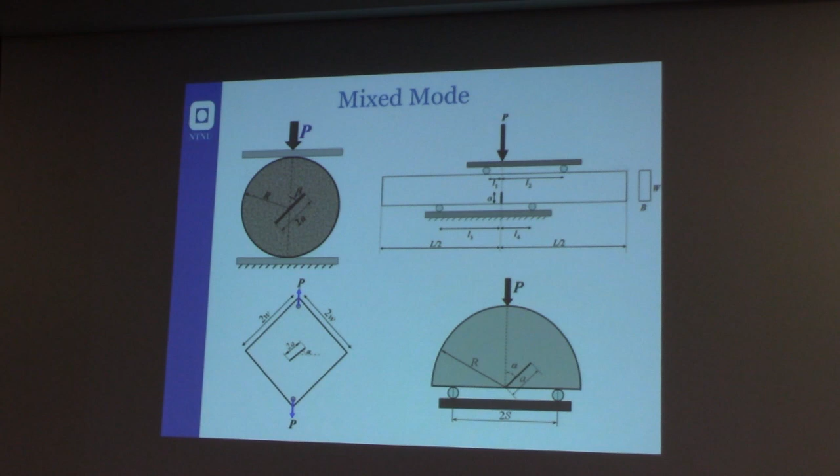So actually the problem of how to treat these modes in terms of final fracture prediction was studied many years ago. And the first two to study the work were George Sih and Fazil Erdogan in the group of Lehigh University that I have shown to you before. And they start to make some experimental tests with the inclined cracks to understand how they behave and how it is possible to predict the behavior of these cracks when they are failing.

Actually, the first paper that was produced from this study was dated 1963. It's a very famous paper that has nowadays more than 2,000 citations, and it's always referred as the most important contribution for mixed mode loading.

Actually, it was establishing a criterion that is called maximum tangential stress criterion. It is based on the idea that if you have a crack subject to mixed mode loading, the direction of the crack propagation is the direction where locally you have a mode 2 that is equal to 0. So locally the crack tends to propagate in the direction normal to the local stress field, so in a condition where you have a kind of equivalent mode 1 condition.

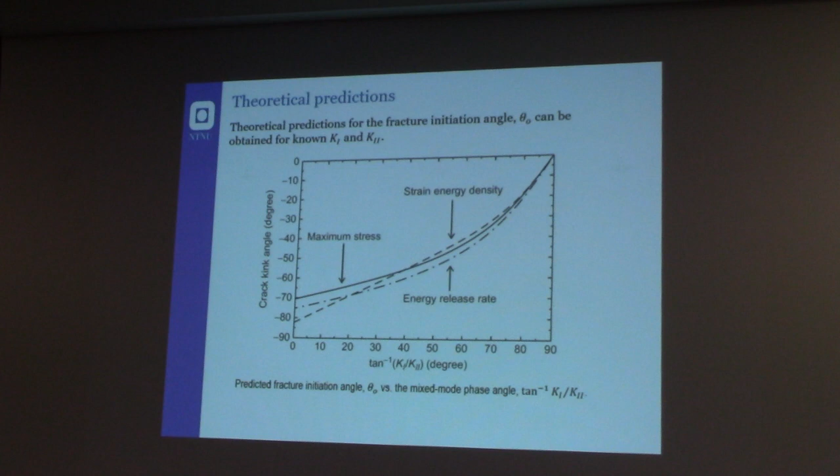After that, George Sih also improved the method, introducing a strain energy density approach that has two advantages. It's also sensitive to the Poisson's ratio variation, and is also insensitive to the mesh size. So this is a big advantage. But actually, in terms of angles of prediction of crack propagation, it is very similar to the maximum stress criterion. So there is not a big difference in terms of angle prediction with respect to the maximum stress criterion and the strain energy density criterion. Actually, they give almost the same value of angle in terms of crack propagation.

What it is very important when we deal with fracture mechanics is that we are assuming a linear elastic behavior for our material. So what it is very important is that we always can use a superposition principle for solving a complex problem. So this is very important.

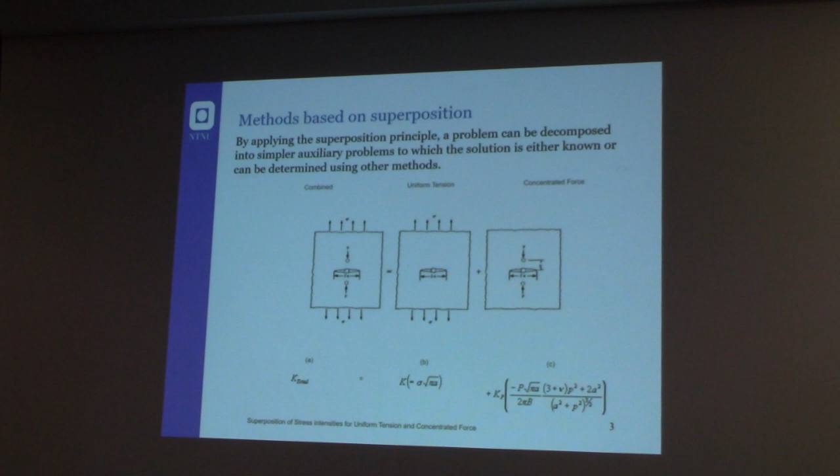Actually, locally, as I have shown before, plasticity occurs, and so sometimes the plastic field is not negligible and we need to take it into account. There are also elastic plastic fracture mechanics solutions. But of course, when you introduce plasticity, you lose the possibility of the superposition principle. So any time you apply a load to your component and obtain a solution, that solution is only valid for the applied load you have used in the elastic plastic solution.

Actually, the J integral is very flexible and can be applied also for elastic plastic solutions, and the stress field for a crack in elastic plastic condition is based on a J integral definition, mainly based on the work of John Hutchinson. As always happens in that period, there were different people working on the same topic. Rice and Rosengren obtained a solution, and Hutchinson obtained a solution in the same year, and after that they started to fight over who was the owner of the solution.

But what is very interesting is that you can express the stress field of the material in terms of the J integral, according to a kind of elastic plastic rule for your material that is no longer linear but follows a kind of power law rule, where n is the hardening exponent of the power law expression of your material.

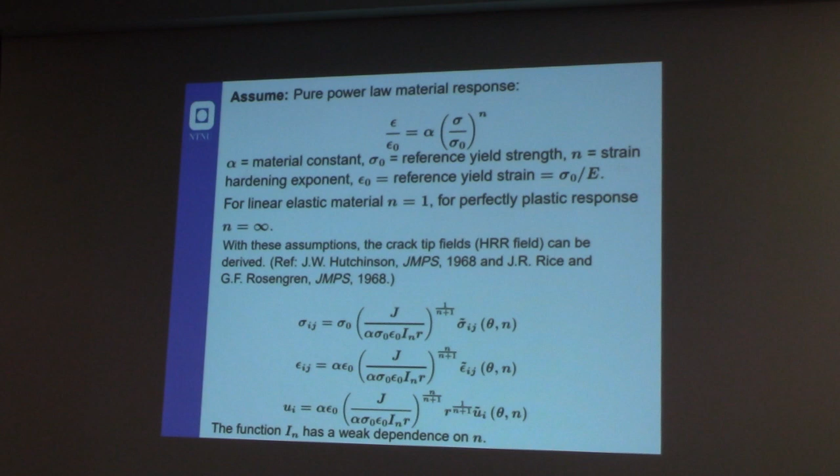And after that, you have this contribution in the exponent of n, which is a material property parameter.

So if you consider a kind of estimation of the plastic radius, it's always very convenient to be able to estimate in some way which is the plastic radius of your material. If you have a crack, you can always understand the size close to the crack where the material is over the yielding strength, and you can measure this radius and define it as the plastic radius of the material.

If the plastic radius is very small, you can apply without any problem linear elastic fracture mechanics. If the size increases, you probably need a more complex model considering an elastic plastic mechanics solution. Of course, the shape of the plastic zone depends on the mode you are applying.

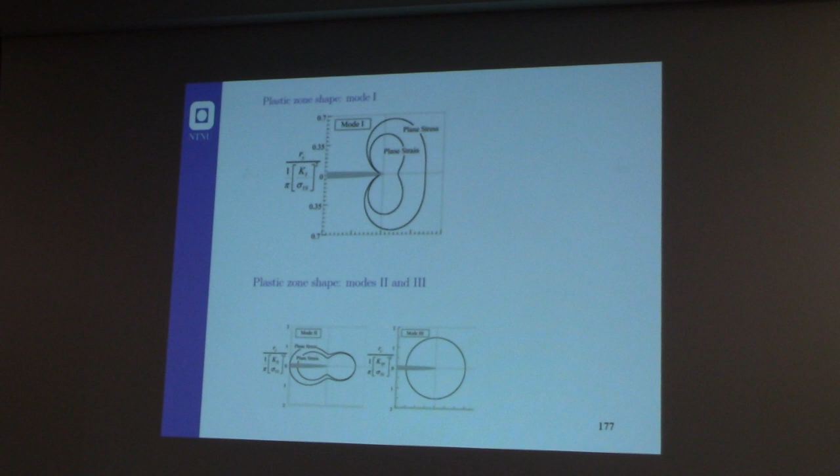If you look at the plastic zone shape for mode 1, you have a kind of butterfly shape, but for mode 2 you have a figure-8 shape, and for mode 3 it's perfectly circular.

But if you're in a condition with large plastic yielding, it means the plastic stress field is larger, and you actually have to design in this field. Linear elastic fracture mechanics only applies outside that region, which is not interesting for the design process.

If you consider this configuration, this is the stress field. n equal to 1 means a linear elastic trend of the material, and you have a slope that is 1 divided by 2 of the stress field. If you increase n, going to a hardening exponent equal to 3, the slope is decreasing. And if you consider an elastic-plastic material with fully plastic behavior, n is equal to infinite, and you don't have any stress singularity—the stress field is almost constant, so you are almost in the static case without any crack.

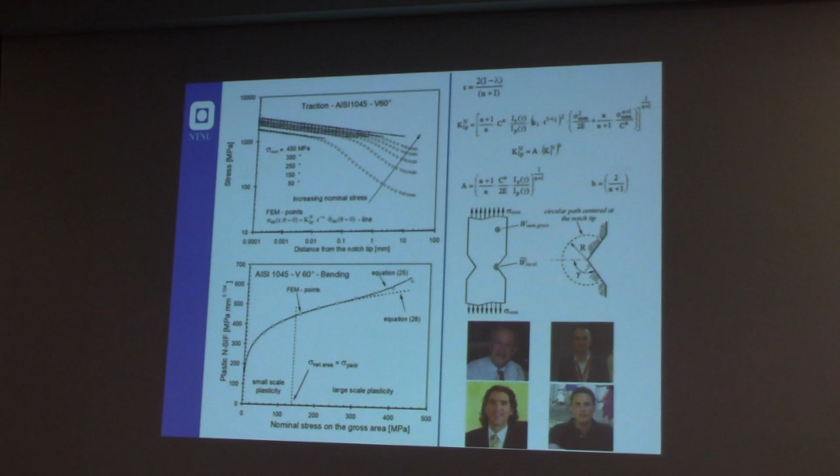And of course, the scale effect is also present for this kind of behavior. It's only the exponent of the stress field that is changing, so the scale effect is changing proportionally to the stress field slope.

I promised you before to arrive at least at the Williams asymptotic solution for linear elastic conditions, and now we are here. Considering the closed form solution, this is the most important contribution dealing with V-notches.

As I said before, if you consider a notch, it's like an extension of the crack case. The only difference is that you don't have parallel flanks of your defect, but you are opening the face of the geometrical discontinuity, maintaining the notch radius equal to 0. So the crack is a special case of this V-notch shape.

The first to solve the issue, as we mentioned, was a German 10 years before, but the most famous contribution is due to Williams, who published this work. Williams was mainly a mathematician, not interested in engineering problems at all, but he wanted to solve this issue and tried to understand which was the stress field close to the notch tip in the presence of a radius equal to 0.

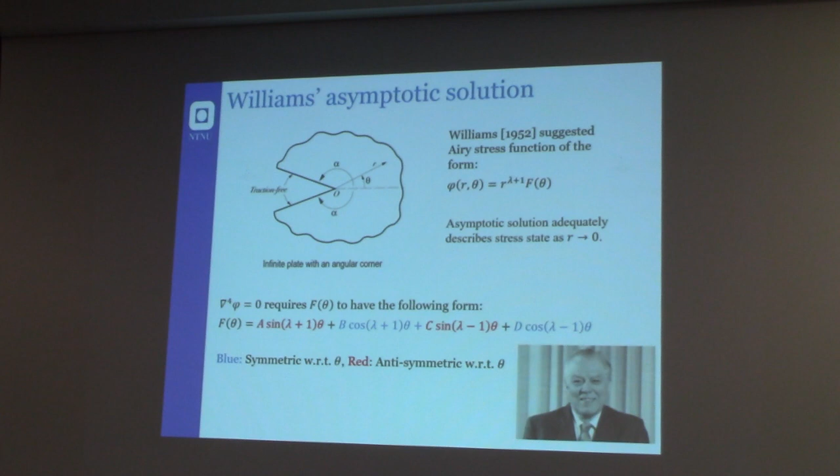What he did was apply the angular expression of the Airy stress function, and by imposing the boundary condition on the edge of the notch that have to be traction free—meaning the radial stress has to be 0, the tangential stress has to be 0, and the shear stress has to be 0 along the traction free edge of the notch—he imposed these 4 boundary conditions on both edges of the notch. So you have 4 conditions, and you are able to determine the 4 constants, and obtain the stress field close to the notch tip.

The Williams asymptotic solution considers that the strain energy is finite in a small disk of radius rho around the corner. It's important to understand that this consideration on energy is valid only if lambda is greater than 0, because if lambda is lower than 0, we have an infinite energy close to the notch tip, which is an impossible solution from a physical perspective.

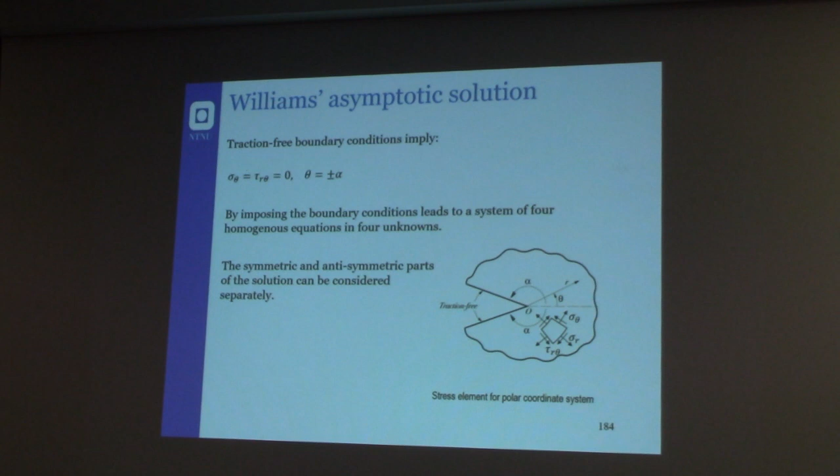What he did was impose that sigma theta and tau r-theta are equal to 0 along the flanks of the notch, and by imposing these boundary conditions, which are quite simple from a mathematical point of view, he was able to find these simple solutions. He showed that there are 2 equations: one for mode 1, the symmetric part of the solution, and one for mode 2, the antisymmetric part of the solution.

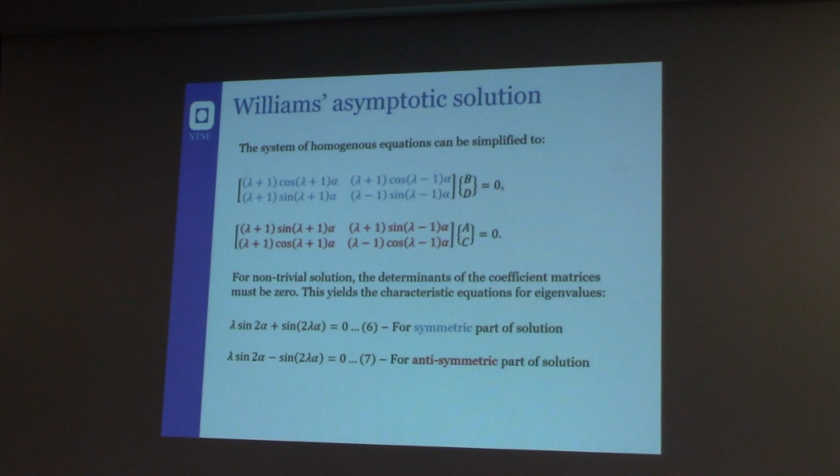Lambda, the unknown parameter in these equations, is called the eigenvalue of the solution, and is actually the degree of singularity of your stress field close to the crack tip. So if you consider lambda minus 1, and if you consider the crack tip, you have a slope that is minus 0.5.

As we did for the crack tip, it's possible to define the same stress intensity factor, which in this case as an extension is called the notch stress intensity factor. It is again a function of the stress field close to the notch tip, multiplied by the square root of 2 pi, multiplied by r with power 1 minus lambda 1 and 1 minus lambda 2 for mode 1 and mode 2. The slope of the stress field is given by 1 minus lambda 1.

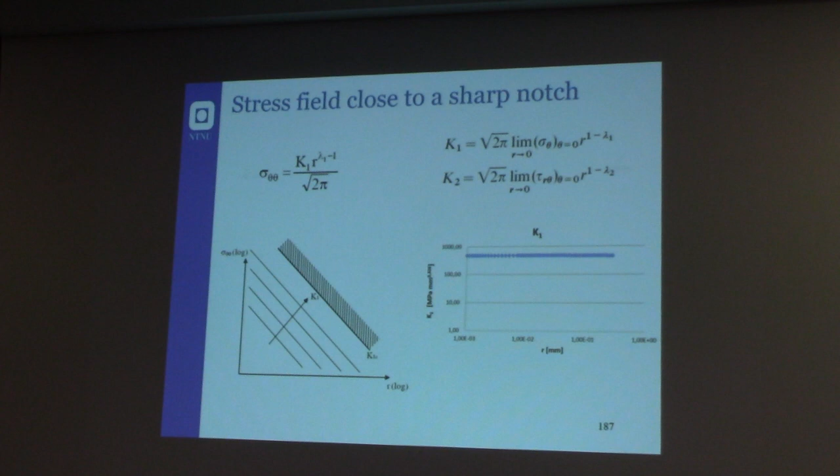This means that with a different notch opening angle, you cannot directly compare the value of K1 for, for example, a notch opening angle of 120 and one of 150, because the unit of measure is changing. This is also very important, and it's a limitation of the approach, because you have no direct comparison between different notch opening angles. This is a very strong limitation.

As I said before, the Irwin solution is a special case of the Williams solution. What's interesting to show, and was also discussed by Williams, and before that by Irwin, is that what we consider in linear fracture mechanics is usually the first term of a kind of series development.

When we consider the stress intensity factor, also in Irwin's equation, we are only considering part of the solution, not all of it, because the solution also has higher order terms that are more complex and change the exponent here.

The leading term is a function of the stress intensity factor, and for that term the slope of the stress field is minus 0.5 for the crack field. But if you want to consider higher order terms, which is sometimes important for thin specimens, you have to develop the series considering those higher order terms as well. It's important to remember this.

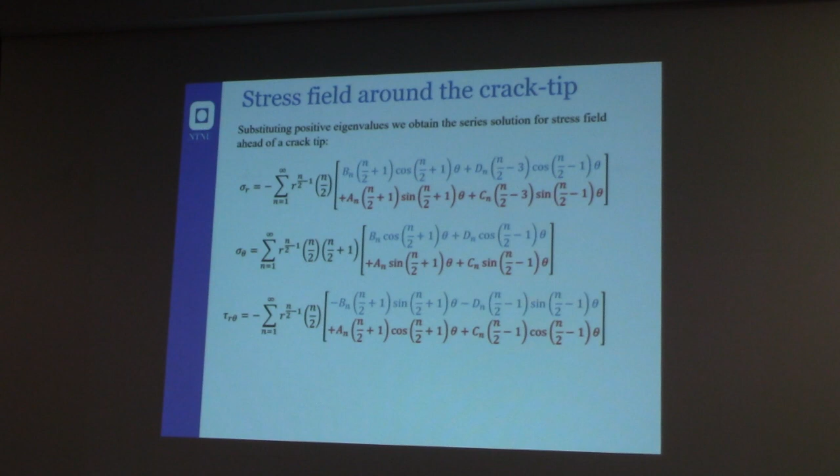95% of our applications are based on the main leading term, and we automatically neglect the higher order terms. But it's important to know that for thin components, sometimes the contribution of the higher order terms matters, and the first of these is the T-stress, which is sometimes very important and has to be taken into account.

After that, Lazzarin and Tovo in 1996, restarting from historical works by Creager and Paris and other works, were able to find a fantastic solution for generalized notches, considering not only a notch opening angle but also a notch tip radius different from zero. They extended the Williams solution to a notch with an opening angle of 2 times alpha and a notch radius different from zero, giving a very interesting solution.

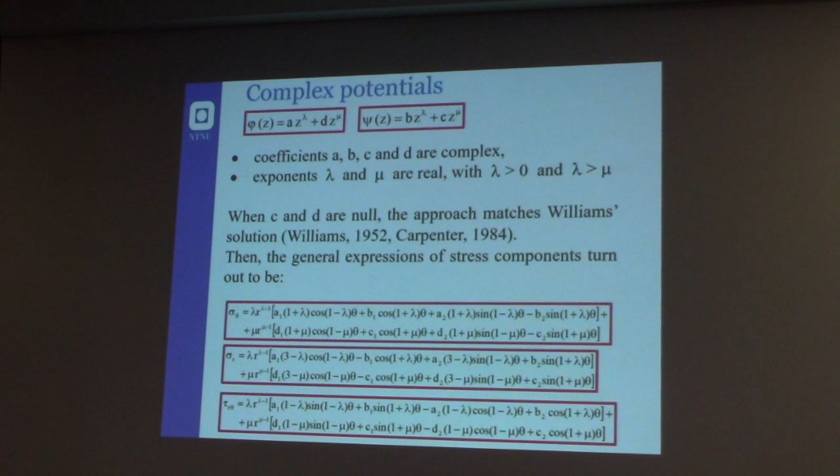They used the complex potential method, applying Muskhelishvili-Kolosov, which we didn't have time to see today but is not so far from the Airy stress function method. What they did was put in the notch radius, which created more complexity in the solution, so they got more constants to find with respect to Williams, but taking into account also the notch radius.

But they were able to impose very smart boundary conditions in the PhD thesis of Roberto Tovo, and they found this final solution that has two parts. The first part is actually the Williams solution, and the second part takes into account the notch radius contribution. So this is very useful because with this solution you can treat in a generalized way not only the Williams solution and the crack solution, but any kind of notch with any shape and any notch radius.

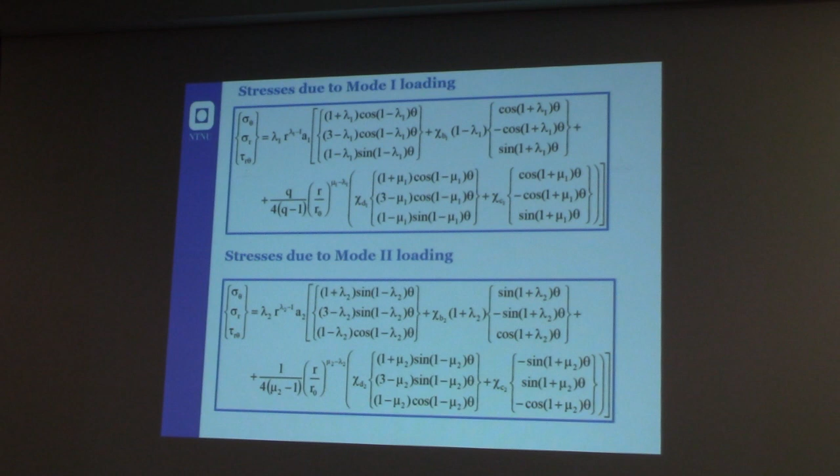So, as a special case of this solution, you can see that we have the Williams solution. But Lazzarin and Tovo were also able to give, as a function of the notch opening angles, all the parameters necessary to apply the equation very easily in a closed form.

So actually, even for a non-expert person in fracture mechanics or notch mechanics, the applications are very easy to use and implement because there are tables reporting the coefficients as a function of the notch opening angles, which make the use very, very convenient. And of course, they define the stress intensity factor in the case of a sharp notch.

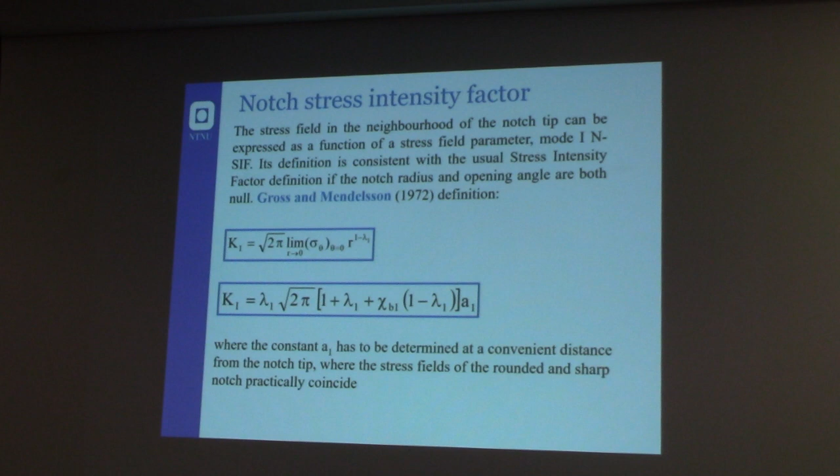They were also able to extend this definition to a kind of generalized notch stress intensity factor that is not only taking into account the sharp case, but also considering a round notch. So they define this kind of stress intensity factor also in the presence of a notch radius different from zero, extending the Gross and Mendelsson definition of 1972.

One of the most interesting applications of these results is the study of welded joints. Because welded joints usually fail from the weld toe or the weld root in the case of lack of penetration. So usually the two critical points for a welded joint are the weld toe and the lack of penetration, which can be considered like a crack.

So what Lazzarin and Tovo did was to apply their analytical framework to this case and express the stress field for mode 1 and mode 2 as a function of the stress intensity factor. Of course, this equation, if rho is equal to 0, is also a kind of Williams equation in this case.

And they verified the validity of the equation considering finite elements and different kinds of notch radius, notch depth, and notch opening angle, and the solutions are very accurate for different kinds of configurations and notch opening angles.

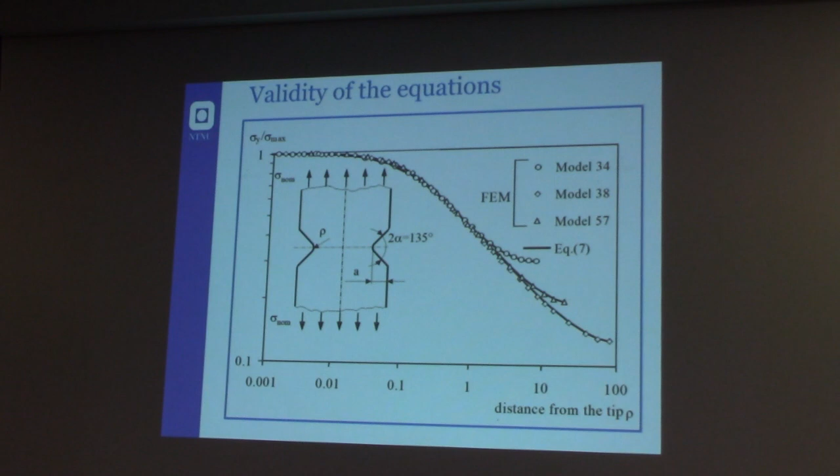I will go back later to the design of welded joints. The problem of the notch stress intensity factor approach when designing a welded joint is that if you have a weld toe and a weld root, here you have a crack and here you have a notch which can be considered with an opening angle of 135 degrees. But as we discussed before, the notch opening angle of 135 degrees has a different stress intensity factor or notch stress intensity factor, which has a unit of measure that is different from the unit of measure of the crack tip.

And so if you don't know where the failure happens, here or here, you cannot directly compare the stress intensity factors because they have different units of measure. So this is the limitation of a stress intensity factor approach for welded joints. Usually, if the weldment is well designed, the failure always happens at the weld toe.

You can neglect the contribution of the weld root, and in that case the notch stress intensity factor is a very powerful parameter. But it still has the limitation linked to stress field distribution, so it is mesh sensitive. You need a very accurate mesh close to the notch tip to evaluate the stress field accurately, and this makes the computational application very complex if you have a complex geometry.

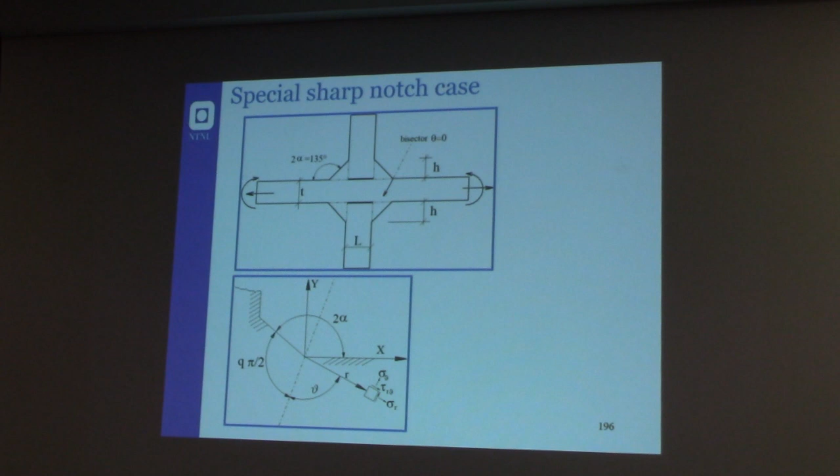The first to try to solve the problem of a notch using a kind of very old approach based on an Airy stress function was Neuber, in his book of 1937, when he was only 32 years old. He wrote this book at that age, and tried with this complex Airy stress function equation.

He was able to find the stress field exponent as a function of Q. After that, because it was very complex, he was able to express only the sigma theta along the notch bisector line, using the definition in Cartesian coordinates of the Airy stress function. He found this solution. This value is not so different from the value of lambda present in the Williams solution, so it is not so far from Williams' solution in terms of eigenvalue.

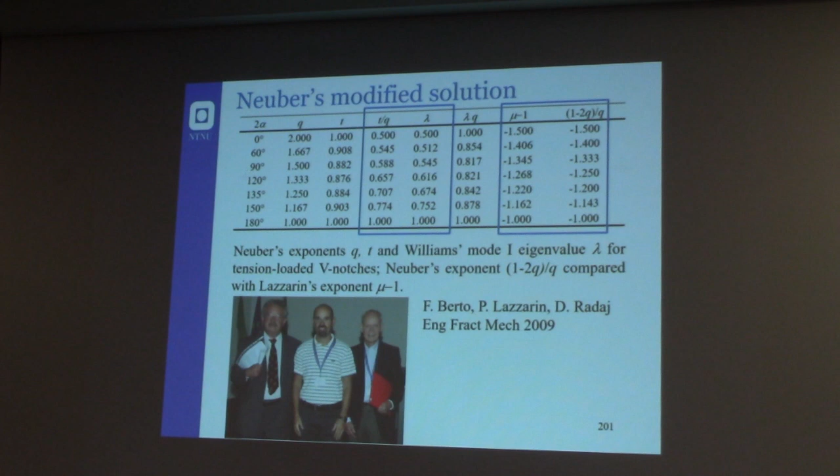What we did later, in 2009, was to modify Neuber's solution, improving it. We were able to obtain a very accurate exponent for the stress field, and also a stress field that could predict the stress field at a far distance from the notch tip, and under complex mode loading conditions.

Comparing finite element analysis with the Neuber solution, you see that the Neuber solution deviates from the finite elements. What we did in 2009, with myself and Radaj, was to improve the solution, making it almost perfect, changing as a function of, for example, the notch radius, while still maintaining a very accurate solution. It seems a small difference here, but it can be 30-40%, which can be very important for the final design of a component. It's not so small.

We exchanged a lot of faxes because Radaj was an old professor, so all communication was by fax. I want to remind a funny episode: he had a very old Mercedes with a fax machine inside the car, connected to the battery. We started fighting over a coefficient during a trip he made, and I completely destroyed his car battery. He was upset with me because I sent many pages of analytical discussion and points, and he wasn't able to reach the hotel during the trip. It was quite fun, but we fought a lot over this paper, because of course he's very German.

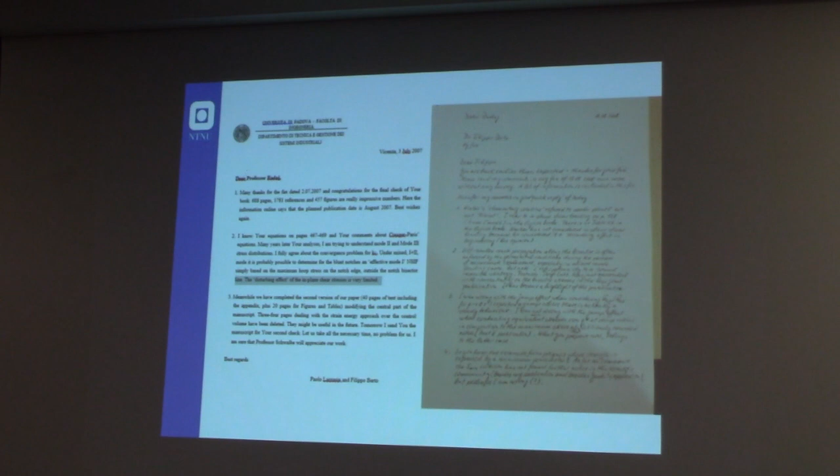It was a very good collaboration, but very complicated because the topic was new, and we were modifying a well-recognized equation by Neuber, who was German and very famous there. Changing those equations made it very difficult to publish; getting the paper accepted in Engineering Fracture Mechanics took 2 years of work, because the reviewers were also upset about the solution and the improvements. We went through a lot of rounds of revision with many improvements, and it was quite tough.

We need to leave Kt and the point approach and go for a fracture mechanics approach, because the value of Kt is increasing too much. If we use this decrease in fatigue life following the Kt increase, we are decreasing the fatigue properties of the material too much, which does not follow the actual rules.

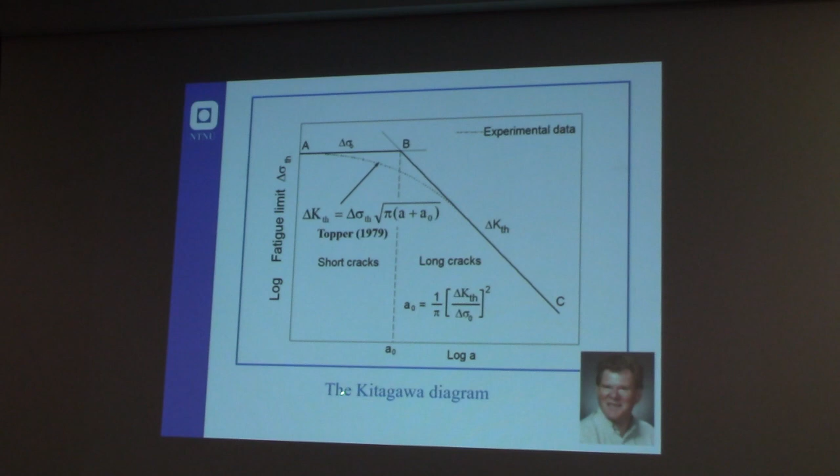Lazzarin and Atzori in 2001, and later in 2005 with Professor Meneghetti, extended the Kitagawa diagram to make a generalized diagram. The first part is the diagram we saw before with linear elastic fracture mechanics, but they added a second part that is the contribution due to notch. This part is the unnotched uncracked component, this part is the linear elastic fracture mechanics component, and this part is the notch component.

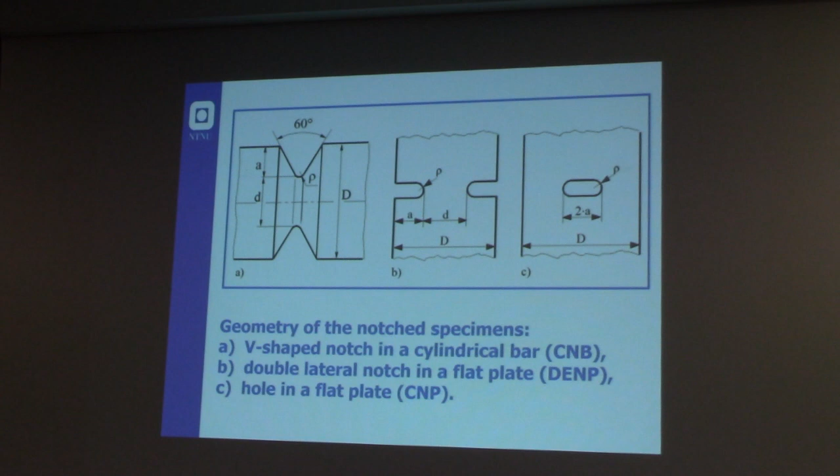So in one single diagram they were able to represent all the material, and after that they were able to use a scale factor to also take care of the real size of your component. They applied the criterion to different materials, and were able to summarize very different structural materials in the same diagram, proving from an experimental point of view the existence of the smooth transition in this part of the diagram.

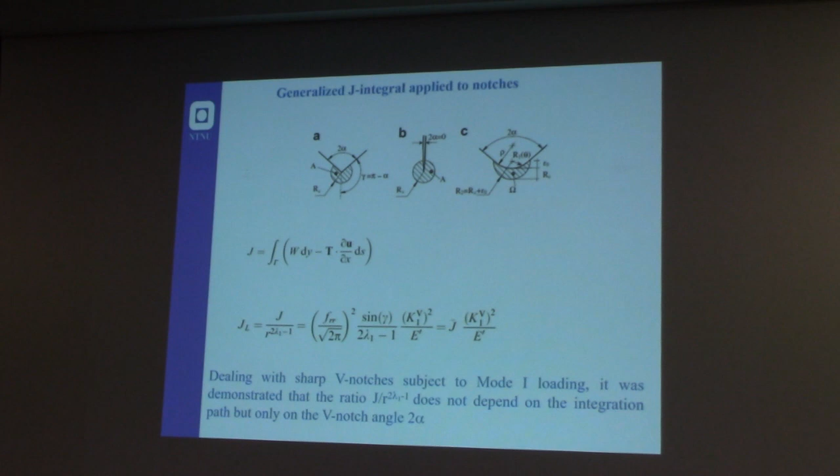So after that, we also extended this work - this is a recent contribution, my paper published in 2007. We were able to extend the J integral, which was initially thought for the crack case, also to a sharp notch and then to a blunt component. What only changes is the complexity of the analytical frame, but the definition of the J integral remains the same. What we lose, opening the notch opening angle, is path independency, because that property is only valid for the crack case.

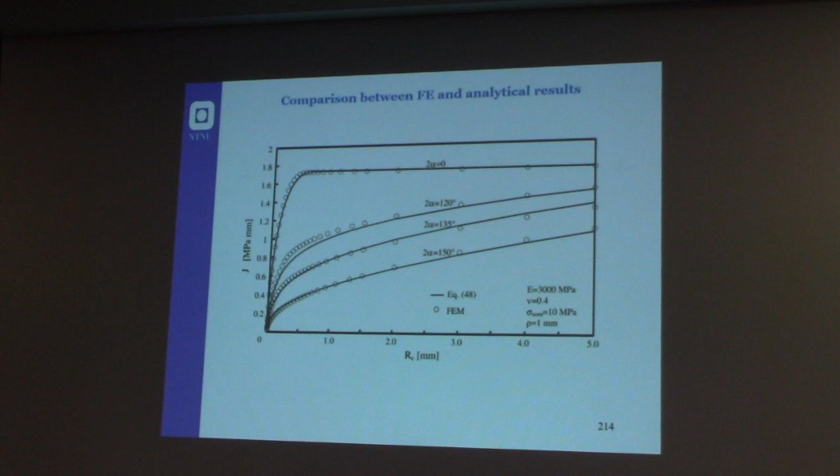We showed this analytically in a work published in 2007. It was more a mathematical work, but after that we also gave some useful tools for design. So if one wants to use the J integral for design, you can find all the closed form expressions for blunt notches based on the Lazzarin-Tovo solution in this paper.

We are able to predict the failure in blunt notches under 3-point bending under mode 1, considering different notch depths and different notch radii, and we are able to predict quite well the fracture behavior under static loading with this generalized J integral approach.

What is very interesting, and not well known until now—this is still an open field of research—is that myself and Professor Lazzarin, Professor Cook, and Professor Kotousov have worked together on this topic to study three-dimensional linear elastic fracture problems, and there are some recent results that are very interesting.

As I said before, we usually consider plane stress and plane strain as the main hypotheses for defining the stress intensity factor and mode of failure. So we have mode 1, mode 2, and mode 3. But if you consider a finite thickness, this changes completely what is happening locally in your component, especially if you have a sharp component.

What we did in the past was to start with a very simple component, like making a kind of trial. We started with something very simple, also because this was during my master thesis, so it was 16 years ago, and I started using ANSYS 3.0—now the version is probably 19 or something like this. So we used a very preliminary version of ANSYS with very few nodes, and we started from a very simple solution.

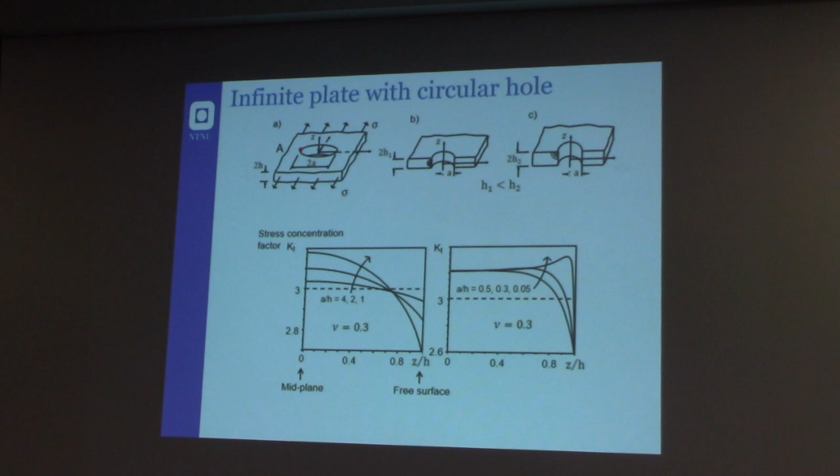So the well-established solution is actually wrong or approximate if you consider a finite thickness for your component. You're not making a huge mistake, but if you have an A divided by H ratio equal to 4, you get an increase of 20% in the stress concentration factor at the notch tip, which is not negligible.

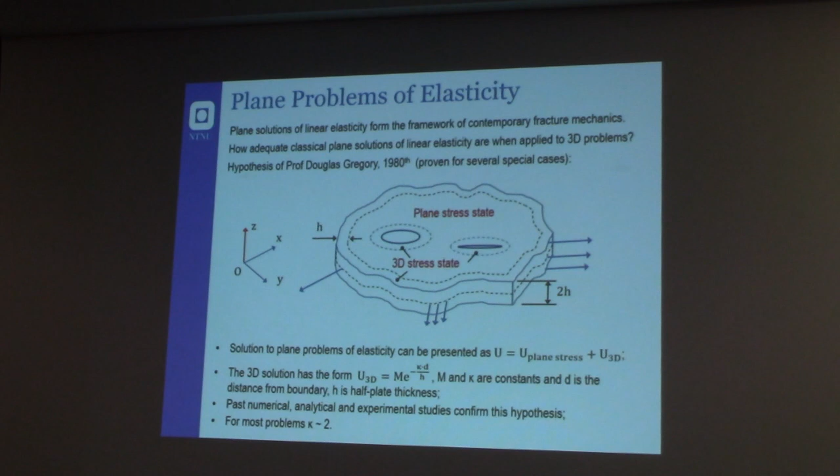What is very interesting is what happens if you have a three-dimensional solution in cracked components—an extension of linear elastic fracture mechanics to three-dimensional components. We've discussed two-dimensional solutions for elasticity all day, introduced K1, the fracture parameter, K1C or KC which is the fracture toughness, and discussed plane stress and plane strain conditions. But what happens if you consider a crack with a finite thickness component? This is the open question we try to answer: does the stress field close to the crack tip change or not, and how? Which is the most important contribution—mode 1, mode 2, or mode 3? There are other modes coupled with the primary modes, so we try to answer this.

The overall problem is very complicated because it requires a lot of computational effort to solve numerically, and when we started this work, we didn't have much computational support or tools.

What we tried to do was study a very simple problem of a disk, where we simply considered a finite thickness H, and then applied boundary conditions in terms of displacement around the disk, representing mode 1, mode 2, and mode 3 solutions, to find out what was happening locally at the crack tip when we applied pure mode 1, pure mode 2, and pure mode 3 nominally.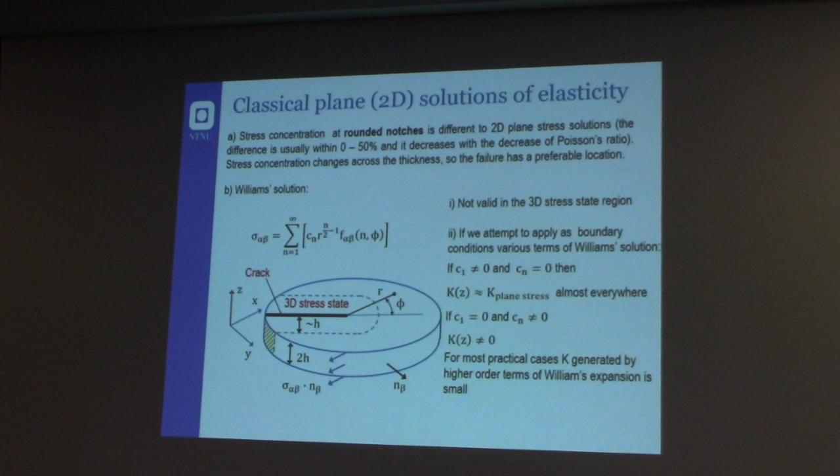What we found is that under pure mode 1, it's like what happens with the circular hole under pure mode 1—you have a stress field that is strongly changing along the thickness of the plate. So you have the maximum stress field in the mid-plane of your component, and a decrease of the stress field when you are at the free surface.

This is half of the plate, and this changes a lot depending on Poisson's ratio. If Poisson's ratio is 0.1, as for some ceramic materials, the sensitivity is very small and you get almost a straight line. With 0.3, there's a 7% difference between the mode 1 solution and the two-dimensional mode solution. A value of 0.5 is very difficult to have, but for a polymer with, say, 0.4, you get an increase of 15% or more in the stress intensity factor. So this effect is not negligible and must be considered.

What's very interesting is what happens with the mode 2 stress field. We applied a nominal shear stress to the component, and due to the three-dimensional effect of finite thickness, you can locally see an out-of-plane displacement. So although you're applying mode 2, due to the thickness or Poisson's effect, you're pushing in one direction and putting tension in another. Close to the free surface of the plate, this generates a kind of coupled mode called mode O, the out-of-plane mode of fracture, which is not predicted by two-dimensional fracture mechanics solutions.

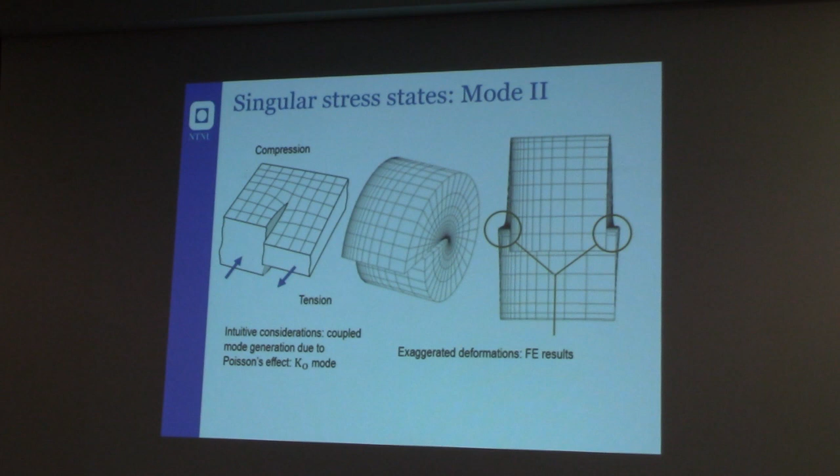This stress intensity factor linked to the out-of-plane mode, which we call KO, is not negligible. Applying a remote stress intensity factor of mode 2, close to the free surface near the crack front, we get a value very close to the maximum nominal value applied. So this effect is not negligible, and it actually explains many failures originating from the free surface of three-dimensional components that are not easy to explain using two-dimensional models. This was a very good scientific achievement.

What we did later was the same kind of analysis, but applying a nominal pure mode 3 load. We found that pure mode 3 also transfers a local mode 2 to the component. So mode 2 and mode 3 are always coupled together, generating additional local mode 2 and mode 3 components close to the free surface. Also in this case, the induced local K3 and K2 values from the coupled mode were not negligible — quite high intensity compared to the generating mode.

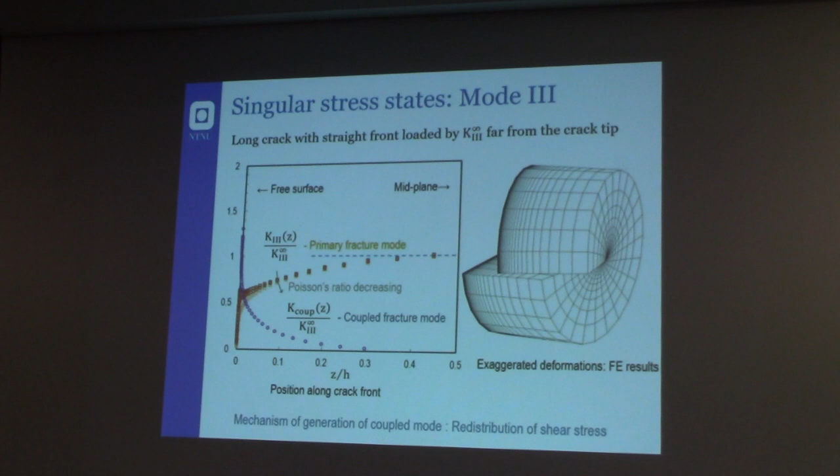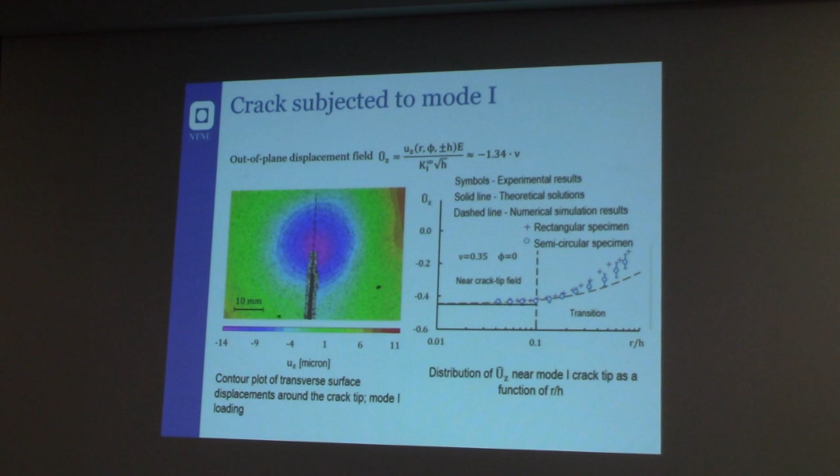We produced a lot of finite element results, but what's interesting is that we were also able to prove the existence of this coupled mode experimentally, at the University of Adelaide in 2011. Using digital image correlation, we measured the displacement. We applied mixed mode — first mode 1, then different combinations of modes — and were able to detect the existence of an out-of-plane mode coupled with the nominal remote load, present only locally on the free surface of the component. We were quite lucky, because the most important three-dimensional effects occur close to the surface, so it's possible to detect them with optical imaging techniques.

What we did also was to extend the consideration to notch components. We simply went ahead with the same approach, adding thickness to a sharp notch component. What we found out was that Williams' solution also has some limitations because it doesn't consider the thickness effect.

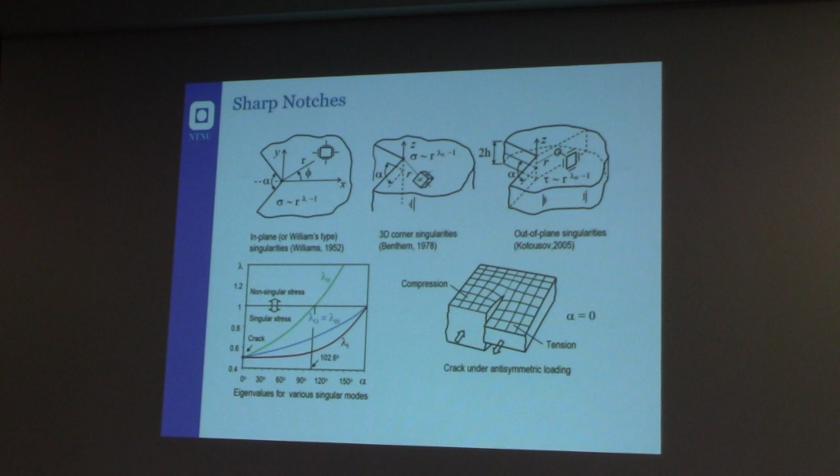If you consider the thickness effect, you find that mode 2 and mode 3 are always coupled together, and you have to consider them for the design, at least if you have a material very sensitive to what is happening on the free surface of the component. So we studied the same case with the sharp notch.

This was the finite element model. What happens is that again we find a strong influence of the Poisson's ratio. If you increase the Poisson's ratio, you find an increase of the intensity of the coupled mode, and again the coupled mode is very localized and close to the free surface of the components.

Here is the mid plane. In the mid plane, actually, you don't have this effect. So there's a strong effect of this induced mode close to the free surface. We also tried to give an analytical solution for this coupled mode, but for this course it's only important to know that the traditional fracture mechanics is based on plane models. If you extend to three-dimensional models, you also have to consider this kind of effect, which is now very well studied in the literature.

These papers are very recent. We published a lot of this work from 2007 to 2015.

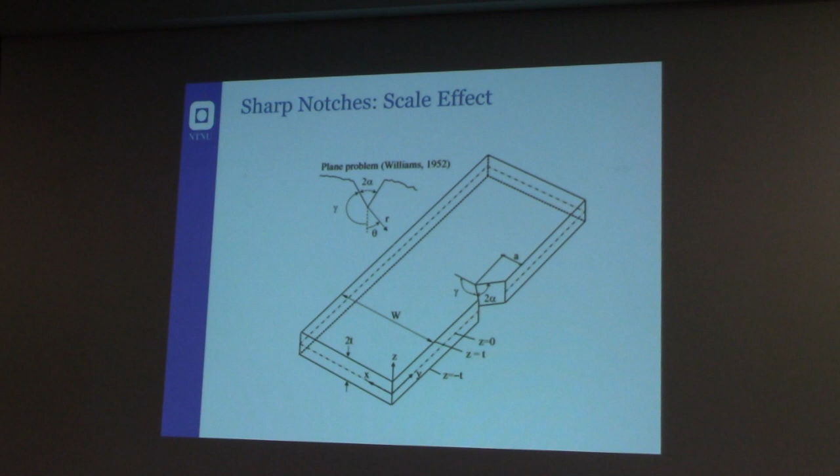What's also very interesting is that, following the rules of linear elastic fracture mechanics, it's possible to use a scale effect because we are in the linear elastic hypothesis. If you scale this plate in geometrical proportion, increasing or decreasing all the dimensions, you can also obtain a scaled stress field, following the rules of linear elastic fracture mechanics, for the generating mode, which was mode 2, and for the induced mode, which is a kind of out-of-plane mode. We made this study to understand if the scale effect was respected also for three-dimensional coupled modes, and in fact it was.

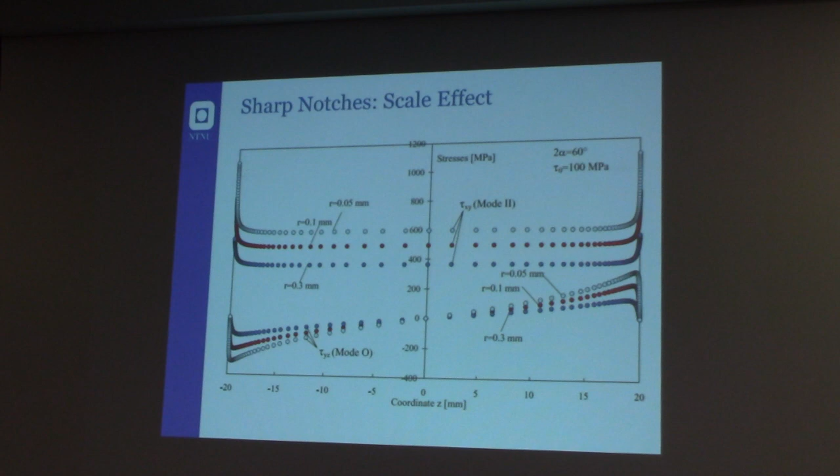This is the stress field along the bisector line. So the scale effect of mode O, if you increase the size of the component, also increases the stress field. If you increase the size of the components, you are decreasing the effect of mode 2. It's a bit difficult, but you can understand it if you make a finite element model very easily.

I only want to show that the advantage of having a linear elastic approach is that you can use the superposition principle, and that the scale effect is always verified. This is the most important consideration that I want to underline.

Summarizing, in classical theories of bidimensional fracture mechanics, we have three primary fracture modes: mode 1, mode 2, and mode 3. Plate thickness is almost totally disregarded in this approach, since the stress intensity factor is considered constant across the thickness. There is no effect in problems with stress-type boundary conditions.

If you consider a three-dimensional theory, you have 5 modes: 3 primary modes and 2 coupled modes. So the modes of fracture are not 3 but 5, because there are also 2 modes coupled with mode 2 and mode 3. The extension of coupled modes is strongly affected by the plate thickness, with marginal effects on primary modes and a strong influence on coupled modes due to these effects.

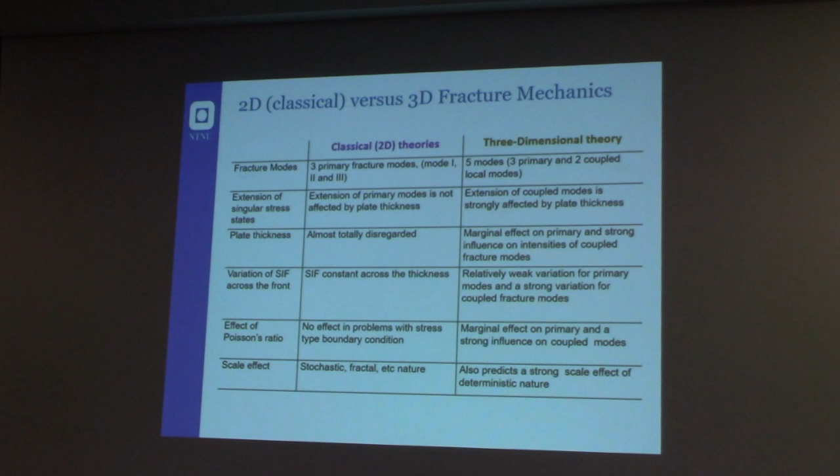I mentioned before that Neuber and Radaj were very important in notch mechanics. Radaj was a student in Munich of Neuber, and they started fighting by fax on analytical solutions when they were very young. This fax is dated 1977, the original fax of Neuber to Radaj, answering some of the practical questions they solved.

In this part of the lecture, I want to introduce some approaches that are useful for design purposes when you are considering notch components. I don't go into much depth, but I want to give you some introduction to this approach.

What Radaj, and first Neuber, did was try to solve the problem of a very sharp notch, a notch with a small notch radius, by averaging the stress close to the notch tip, considering a microstructural support length, which is a material property called rho star.

They considered that the point value of the stress concentration factor is not very important for fatigue or fracture purposes, because as we've seen in the diagram of Frost, if you consider the stress concentration factor, you are too conservative in the design because the notch is sharp and rho is very small. So what they try to do is average the quantity of the stress over a material property length, rho star.

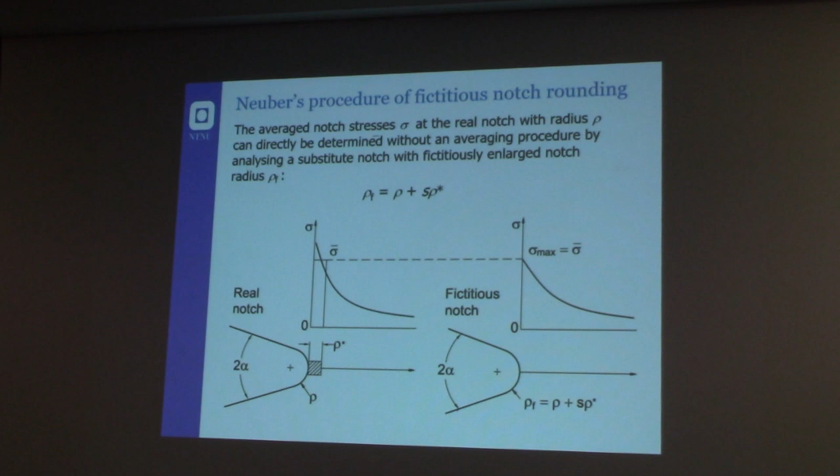quasi-sharp notch. The microstructural support length was discussed by Radaj for different materials. For steel and austenitic steel, we are in the range of 0.3 to 0.4 as a critical support length of the material. And the Neuber procedure of fictitious notch rounding can of course be applied if you also have a

sharp case, because if you have a sharp case, what you can do is simply avoid this term, which in the initial model is equal to 0, and in the fictitious notch radius approach, you have S multiplied by rho star. This method wants to avoid the singular behavior, to avoid treating the singular problem of stresses tending to infinity close to the crack or notch tip.

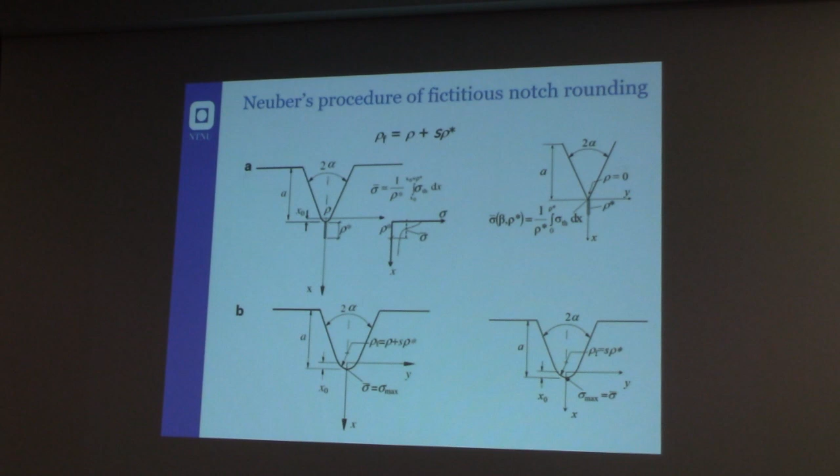Radaj proposed this in the standard for weldments and welded joints. For welded joints, the equation is rho f equals rho, the worst case condition, so rho equals 0, S equals 2.5, and rho star equals 0.4.

So for welded joints, for design purposes, what they do is give a fictitious notch radius of 1 millimeter. So if you want to design a weldment, you substitute the real value at the weld toe with this notch radius, and you can directly read the stress field or the stress concentration factor at the point of the notch with the radius equal to 1 millimeter.

This is also reported as the only local approach accepted nowadays in the standard for welded joints. If you have a welded joint, what you can do is substitute the critical points with the critical radius equal to 1 millimeter, and then determine where the maximum value of the stress concentration factor occurs at that position.

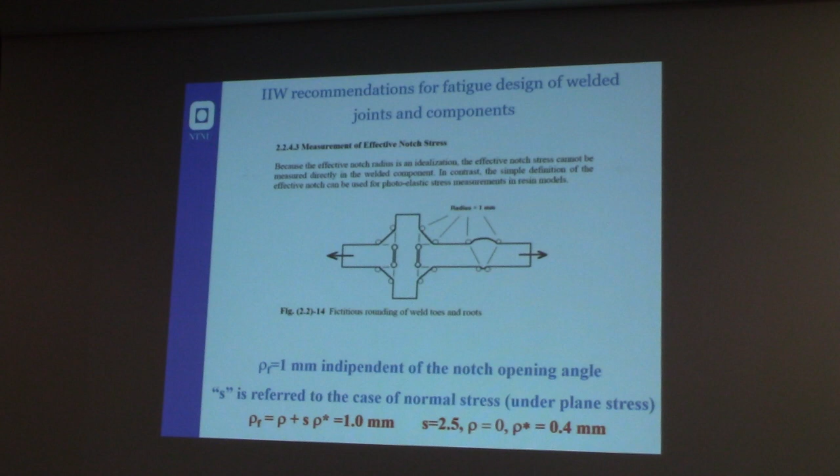You can actually design a weldment completely bypassing the effect. After that, we worked a lot on this with Radaj from 2009 and later, and we apply the same concept to mode 2 loading.

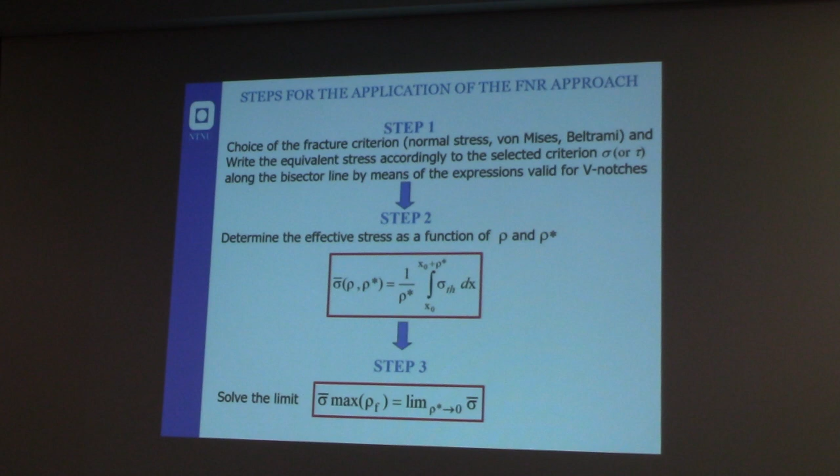I have a report here giving you a complete overview of all these references. But after a lot of exchange of faxes and a lot of fights, we developed a method that is quite general, able to give a very good approximation if you try to apply it to different configurations of notches and different kinds of modes, and the papers report all the solutions with all the steps.

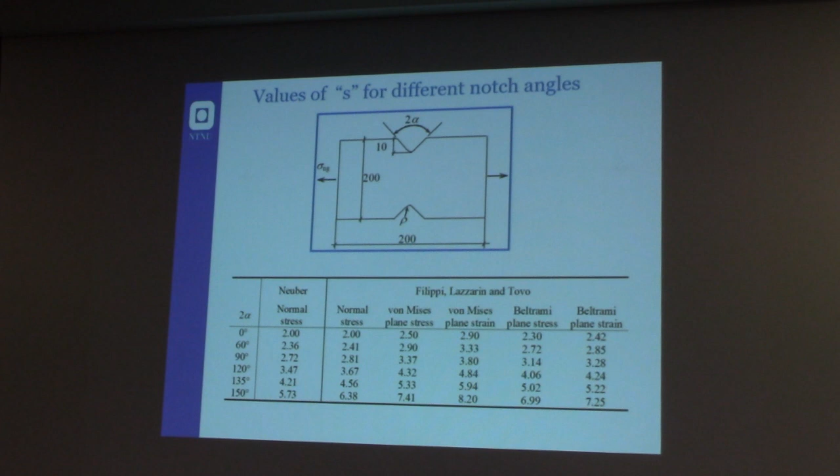The analytical solutions are very complex, but what we did is summarize the results in very simple graphs that are easy to use from a numerical point of view, and very easy tables reporting how you have to consider the parameter S as a function of the notch opening angle. So even a person not very skilled with analytical tools can use the method for designing purposes, because we are engineers at the end, for fatigue or fracture prediction.

But this method actually completely neglects, wants to completely avoid, the problem of stress field with many different graphs that I don't want to mention. And we also treat different kinds of notches.

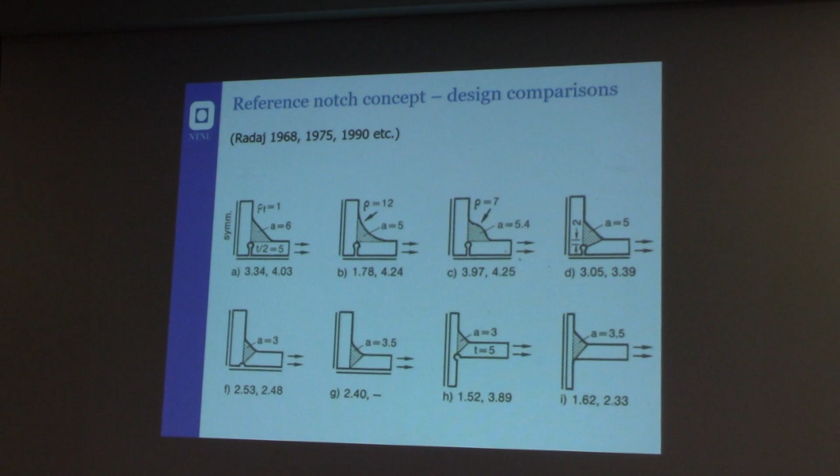After that, Radaj in his book reports directly also the stress concentration factor for the most used welded joints, so you don't need to even make the finite element models, because you have directly the stress concentration factor reported in the book. So you can make design of everything for design purposes.

After that, Petersen, using our findings, was able to make some standards, also reporting a lot of data of welded joints, and giving some design curves that are very interesting under fatigue loading, because they are very simple to use and based on a very simple approach. But of course the drawback is the big scatter that you have, meaning the approach is not very accurate, so there's still something to do.

So what we did, and what some people did before us, was to actually treat the singularity in some way. Following Neuber, the first to make this approach were Professor David Taylor from Trinity College and Professor Luca Susmel from Sheffield University.

They developed the so-called theory of critical distance, and they were able to consider different methods: point method, line method, and area method. What they did was integrate the stress field along the notch bisector line. In the line method you integrate along a line with a length of 2L.

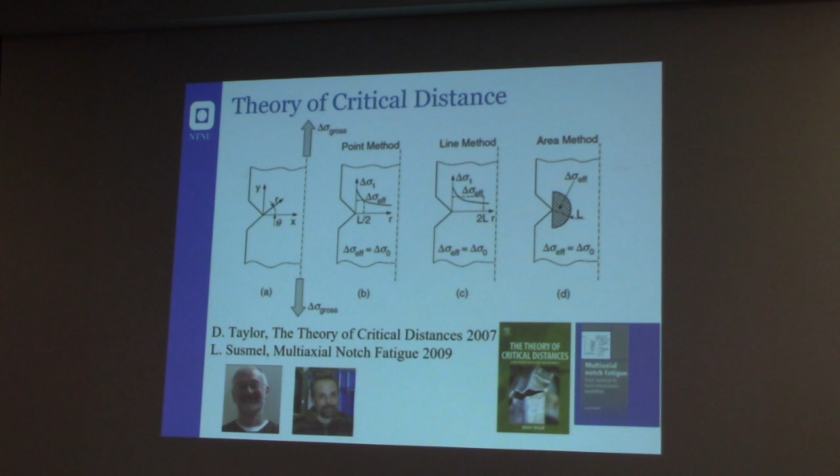In the point method you only look at the stress at a certain distance from the notch tip if it is sharp. In the case of area, you average the stress over a volume and evaluate the average stress over that volume.

It's also worth mentioning that before Susmel and Professor David Taylor, there was an eminent researcher who did the same. The first was Peterson in 1959 who tried this approach. After that, I think the most relevant contribution is due to Professor Tanaka, who is quite famous in Japan and considered the king of notch in Japan.

And after that there is also a Polish professor, Seweryn, who made the same contribution. This is an extract of a paper from 1984 by Tanaka.

The idea of averaging was not first proposed by Susmel or Taylor, but was taking advantage of the work by Neuber. Professor Sheppard in 1991 proposed the idea of averaging, but she proposed averaging over a very strange triangular shape that is not very significant for designing purposes, and also very difficult to manage computationally. She is now working in Stanford for many years.

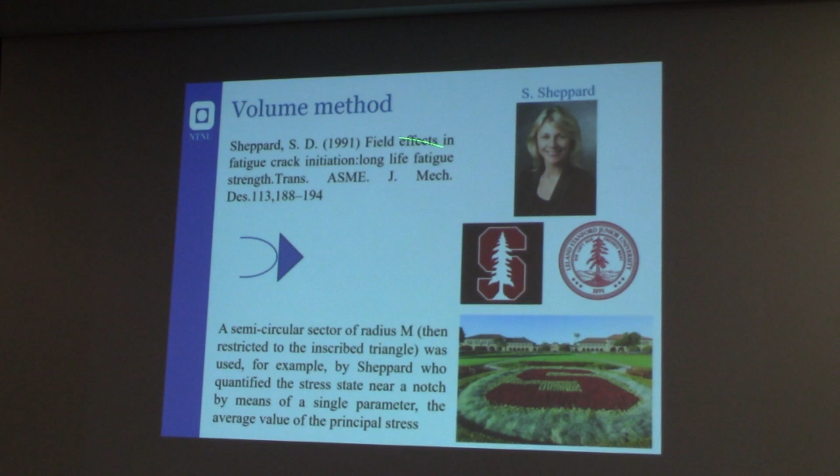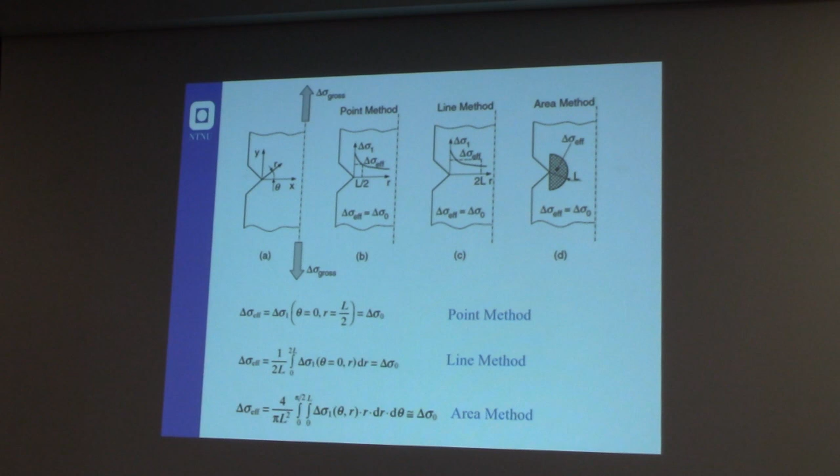The point method, the line method, and the area method are well studied by Luca Susmel and Taylor, who made a very good work of synthesis. One of the most relevant papers on this topic is one published in 2008, where they applied this theory of critical distance to brittle failures of polymethyl methacrylate, considering mode 1 and mode 2, and also mixed mode 1 and 2 in combination. That was quite new at the time, and they obtained very good results in terms of predictions, with some peaks in the errors, but not big mistakes.

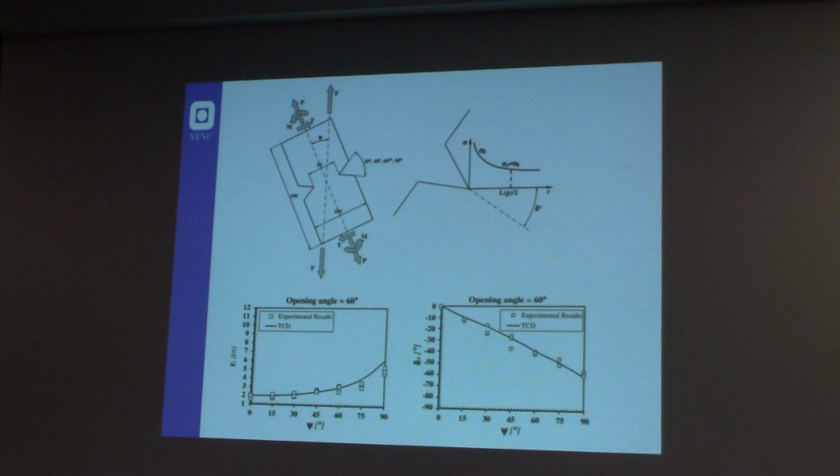I said before that weldments are always a kind of extensive extension of a sharp notch. If you consider a weldment, usually we have a notch opening angle of 135 degrees, and at the root we have a notch opening angle equal to 0, so we have a crack, or a notch opening angle of 135. We can apply the notch stress intensity factor for design purposes, considering the stress singularity.

The problem is that, as discussed before, we have different units of measure here and here. Usually the notch stress intensity factor is very powerful if you have failure only from the weld toe. Usually, if the weldment is well designed, we don't want internal failure. We want to detect the initiation of cracks from the outside, not starting from the inside. So if we are making a good design of the weldments, the majority of failures happen from this point and not from this point.

So what Professor Lazzarin and Tovo did in 1998 was to study different welded joints with main plate thickness ranging from 6mm to 100mm, and transverse plate thickness ranging from 3 to 200mm, so a very wide range of sizes.

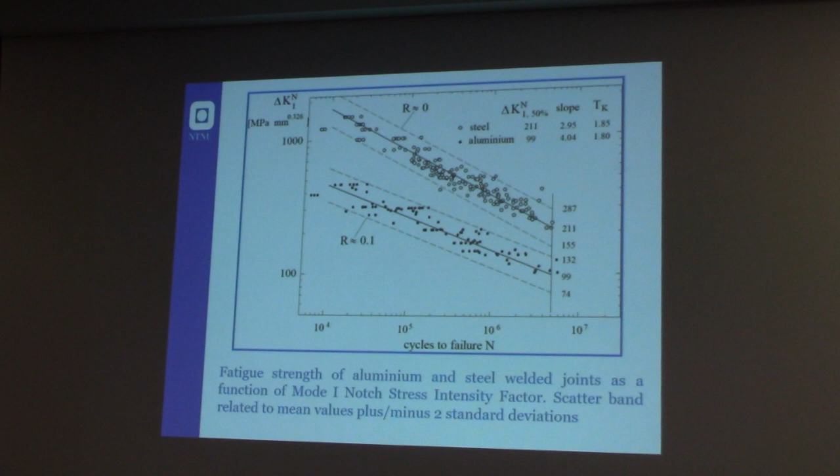The advantage of the local strain energy density approach is that it automatically accounts for two considerations. The first is that if you have the notch stress intensity factor, you cannot compare notch opening angles of different sizes. So if you have a notch opening angle of 90 degrees and one of 135 degrees, you cannot directly compare the values because they have different units of measure. The second point is that the notch stress intensity factor is based on the stress field close to the notch tip, meaning it's a stress-based approach and not an energy-based approach.

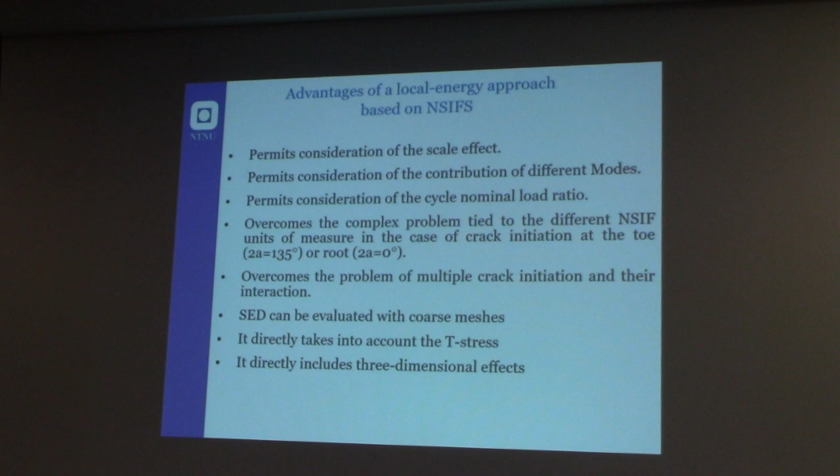This makes the computational effort much higher because you cannot use a coarse mesh. You always have to use a very fine mesh close to the notch tip.

What Lazzarin and Zambardi did first in 2001, and what we later extended to many other applications, was to develop a parameter called R0. It's reminiscent of the rho star value of Neuber, a kind of microstructural support length called rho star, here called rho 0.

The idea is not to use a stress average in this volume, but a strain energy density instead of the stress for design purposes. We are actually merging together a kind of theory of critical distance plus the consideration of a microstructural support length of Neuber.

The strain energy density inside the control volume is a function of the stress intensity factor of mode 1 for the notch and the stress intensity factor of mode 2 of the notch, multiplied by the radius r where you are averaging this quantity. It's a very simple equation connecting the strain energy density average in the control volume to the stress intensity factor that you can measure.

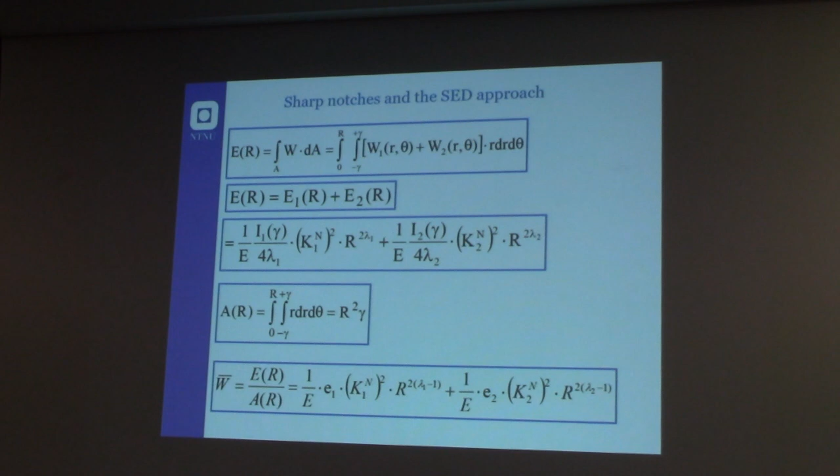It's a more powerful tool, and the advantage is that the strain energy density always has the same unit of measure independent of the notch opening angle. So you can directly compare a notch with an opening angle of 135 degrees and the crack case, for example, without any problem. You can consider this kind of notch and this crack and always very easily compare the results.

R0 is the control volume radius of the material. I will give you the definition later.

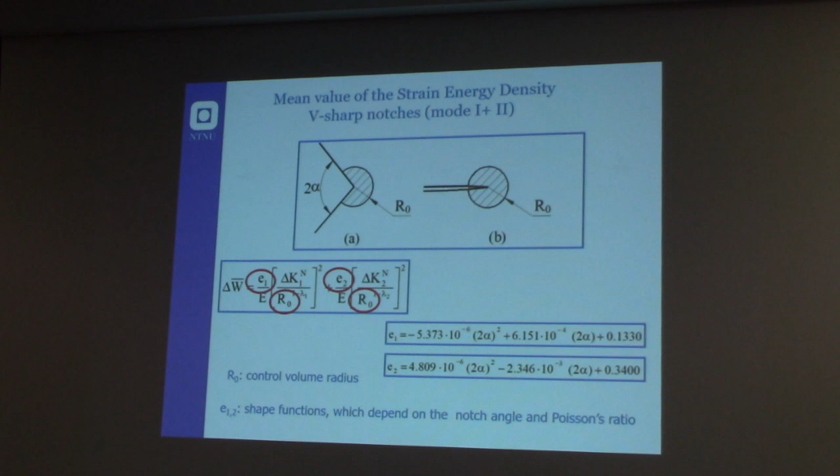Delta K1 appears because we are thinking of this equation for fatigue applications, so we always use the range delta K. But E1 and E2 are only a function of the notch opening angle, so they're very easy to evaluate if you have these simple expressions. They are only a function of 2 times alpha, and this expression can be used with a simple calculator.

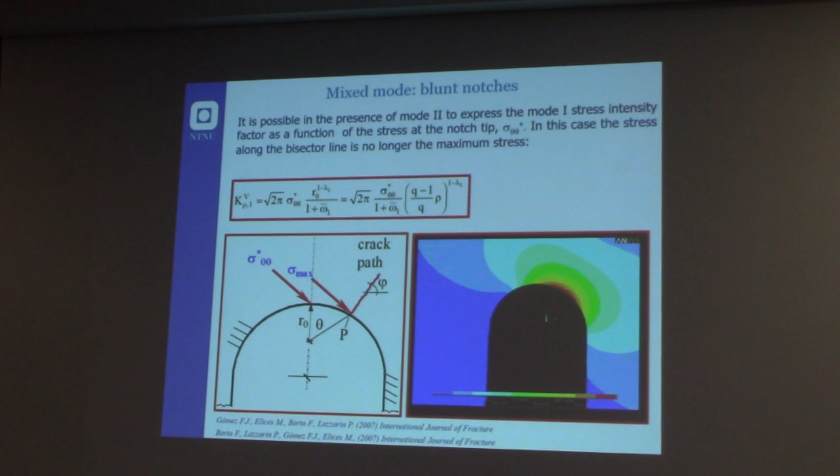We apply the same concept to mixed mode loading, considering the maximum tangential stress approach, a kind of local mode 1 approach. We consider that along this bisector line we have mainly mode 1 loading. So what we did was simply rotate the volume under pure mode 1 to a volume like this, maintaining the length R0 for both volumes. It's simply a rotation of the volume, so the method can also be applied to mixed mode conditions.

We define the control volume radius R0 as a function. For defining the control radius under static loading, you need two fundamental parameters: the energy of the material for the unnotched material, and the energy of the material for the crack material. So you need tests from the unnotched specimen and the crack specimen.

If we consider the energy for the material as a critical parameter, we have to consider that the energy for failing the unnotched material is the same energy used for failing a crack material. Equating these two equations, it's possible to obtain R0 as a function of the Poisson's ratio, the fracture toughness, and the ultimate strength of the material. It's a very simple closed form expression giving you R0, a material property, as a function of simple tests that can easily be made on standard and also complex materials.

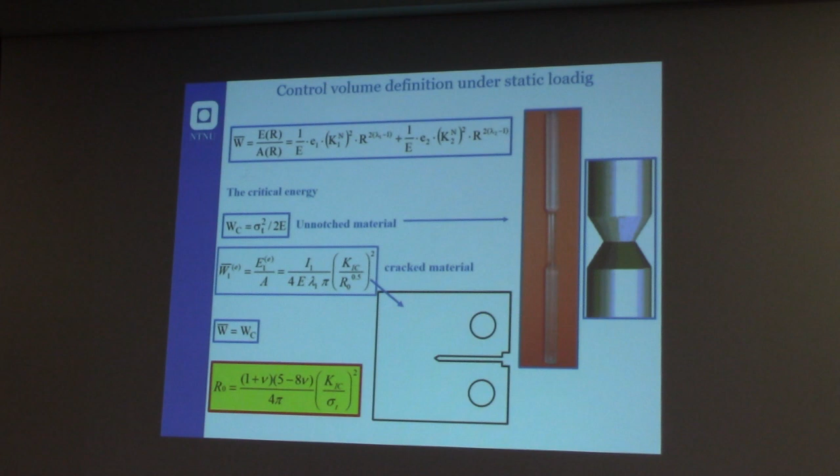We tried to apply the approach to different notch configurations, as a function of the notch radius. This was made in collaboration with Professor Elices and Professor Gomez in Madrid. In the end, we were able to synthesize more than 1,000 results, made by us and about 900 taken from the literature, where the critical radius ranged from 0.4 micrometers to 500 micrometers.

The ultimate strength of the material was ranging from 2.5 to 1,200 megapascals, so from a very soft polymer to almost an ultra strong steel, with a fracture toughness ranging from 0.15 to 55 megapascal multiplied by square root of meters. So a large variation.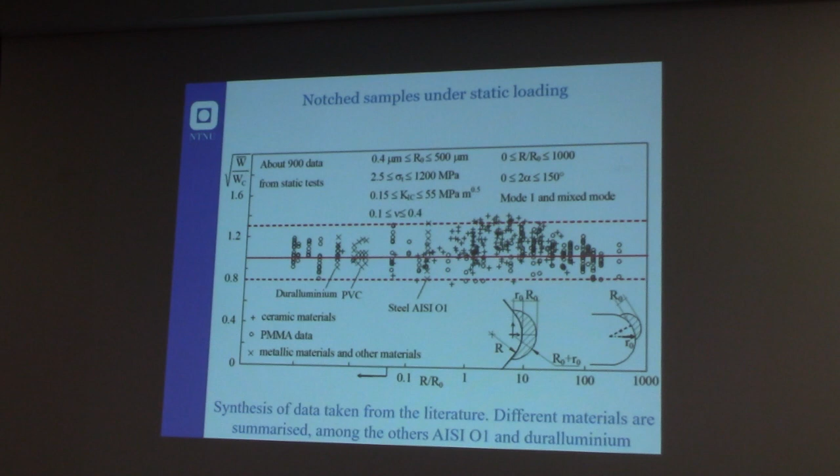Mode 1 and mixed mode load were included in this, so the results were quite good. We also applied this to graphite under mode 1 and mode 3 loading. Actually, this was the first time that we applied the strain energy density criterion also to mode 3 loading.

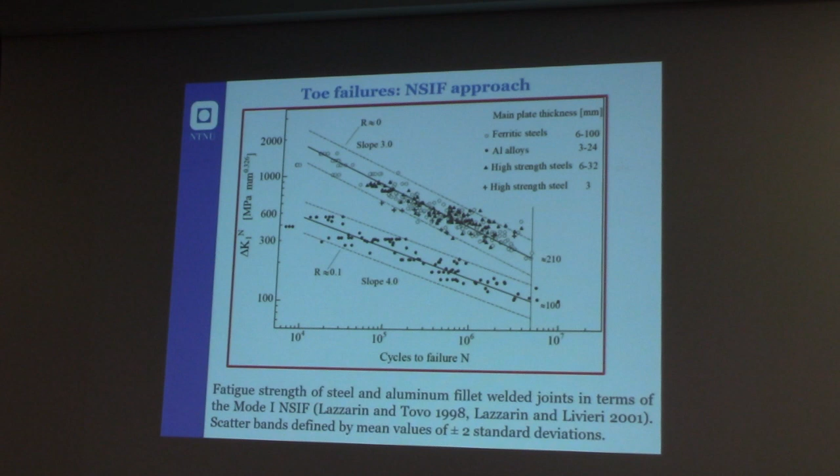And of course, we also applied the same consideration first to the data that Lazzarin and Tovo obtained in 1998. We defined for the weldments the same consideration that we made before for static loading.

We actually consider a welded material without any geometrical discontinuity, and this is the critical radius. So the energy of this component has to be equal to the energy close to the notch tip for this component. So the energy of the unnotched component has to be equal to the energy of the notched component for determining the value of the critical radius. So you need always two pieces of information.

In this case, we were thinking of fatigue, so we were referring to the critical value of the notch stress intensity factor at 5 million cycles, for example, and delta sigma A is the value of the unnotched material at the same level of number of cycles.

In the literature, you can find that these two numbers are this one. This is the value of the critical value for the unnotched weld material, and this is the value of the critical notch stress intensity factor for welded joints.

Considering failure occurring from the weld toe and weld root, we were able to summarize more than 900 fatigue data for weldments in a single scatter curve that can now be used for design purposes, at least for steel, if you consider a critical radius of 0.28 millimeter.

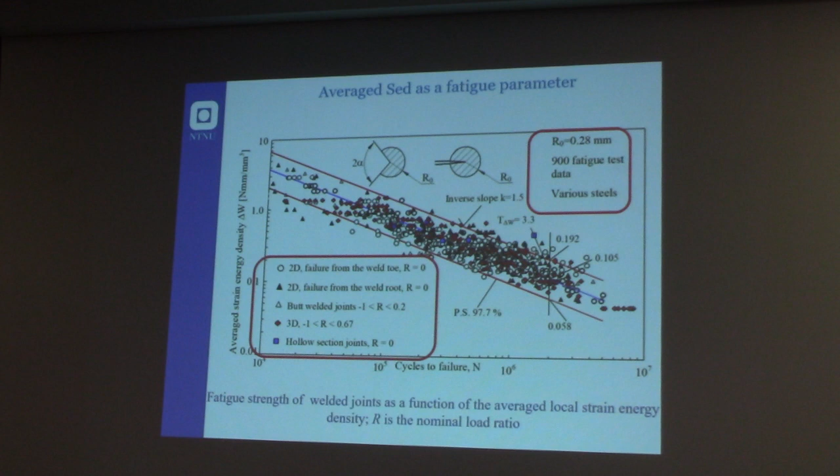The advantage of the approach is that you can use a very coarse mesh. You don't need a very refined mesh for making any calculation. But this is only a plane case, a bidimensional case. If you consider 35 elements in the entire model and 5 elements in the volume close to the notch tip, you can actually evaluate the strain energy density very accurately.

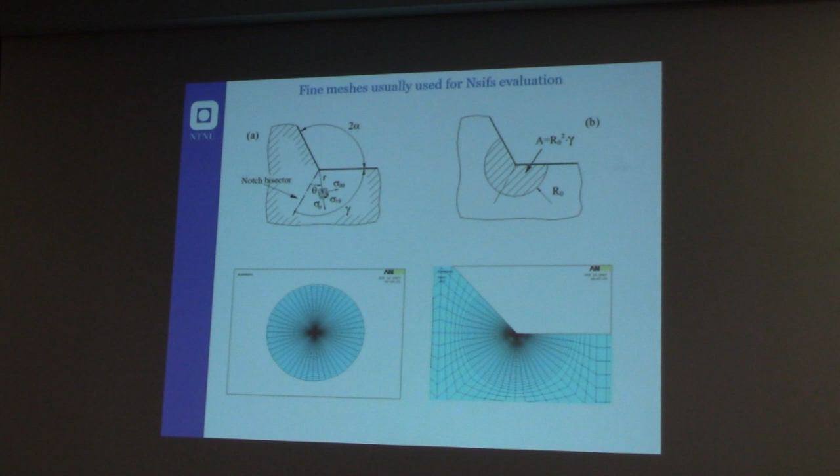If you want an accurate value of the notch stress intensity factor, you need a very fine mesh close to the notch tip, which is very, very heavy if you consider three-dimensional models. So we actually gave some guidelines in a paper published in 2007 and also in a paper published in 2010 on how the mesh close to the crack tip has to be made to make the method efficient. And after that we applied it to different configurations.

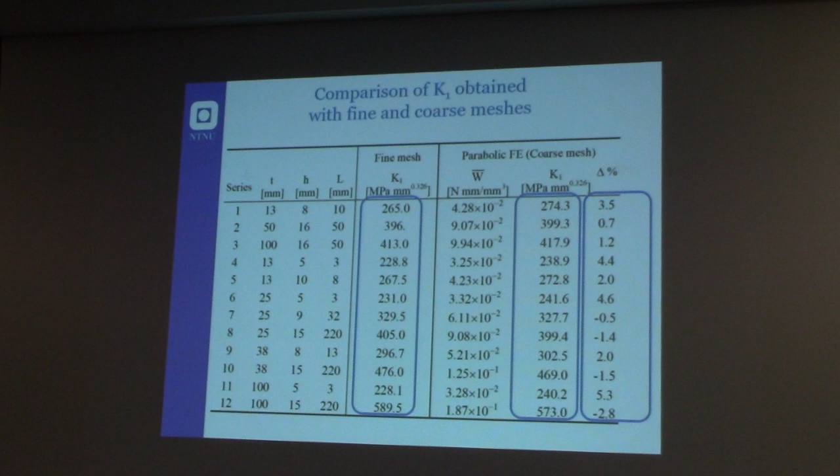What we found out is that considering a fine mesh, you have this value of the notch stress intensity factor. And considering a coarse mesh, a posteriori you can derive the notch stress intensity factor from the strain energy density. The difference you have is very small, almost 3-4% in terms of notch stress intensity factor if you use a very coarse mesh with respect to a fine mesh. So this is very efficient.

Of course, this method is very powerful if you use it for a three-dimensional component. You can use a very coarse mesh close to the notch tip, and you can evaluate the three-dimensional energy density in a three-dimensional model very easily with a very light model.

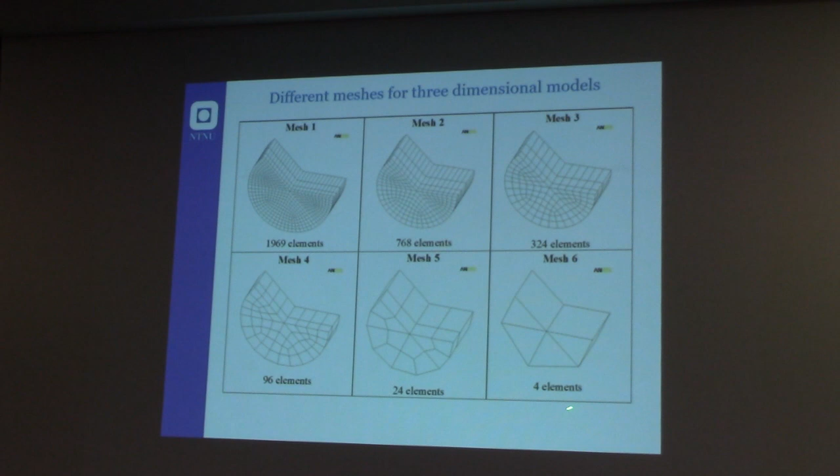So we compared, for example, mesh 1, mesh 2, mesh 3, mesh 4, mesh 5 with different increases of the size of the volume of the elements. We reach the extreme case of 4 elements in the critical radius versus more than 1,000 elements inside the volume. If you compare the results, the difference is 2%. So it's a very efficient method.

Actually, we used this method for designing the Panama Gate. In 2015, we started this project in collaboration with Cimolai, a big industry in Italy making large civil constructions.

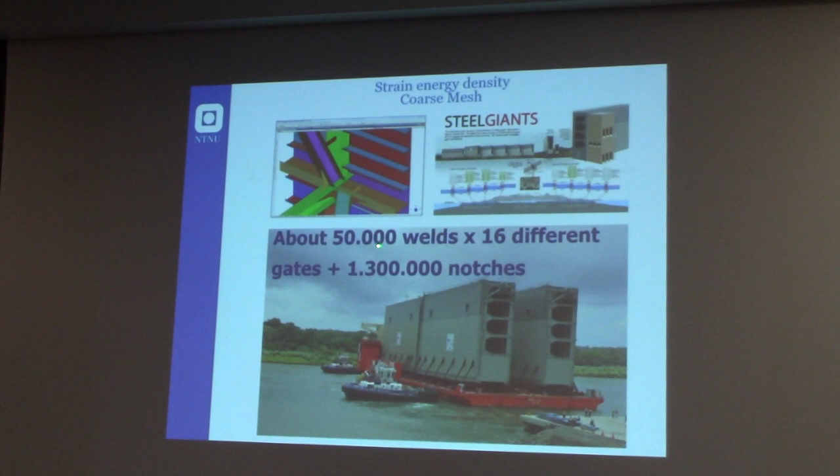The transportation was made by sea. The Panama Gate was composed of 16 gates, and every gate has 50,000 weldments plus 1.3 million notches. These gates are subject to fatigue because the transportation was made from Europe to Panama using a ship, with waves at sea of 10 meters, which created cyclic loading to consider in the design.

We developed a very interesting tool based on artificial intelligence, neural networks, and machine learning, able to design in an efficient way. It is also able to remember previous details considered in the design, without repeating any finite element simulation if a weldment detail was already considered before in the computation.

It was the first time we applied this. When we started the project, there were almost 30 engineers dedicated to the design of the gates, designing every single critical node one by one. But with this automated model, we were able to first make a macro model of the gate to detect the most critical points, and then concentrate our attention only on the critical nodes of the structure, not all of them, since many are without any load.

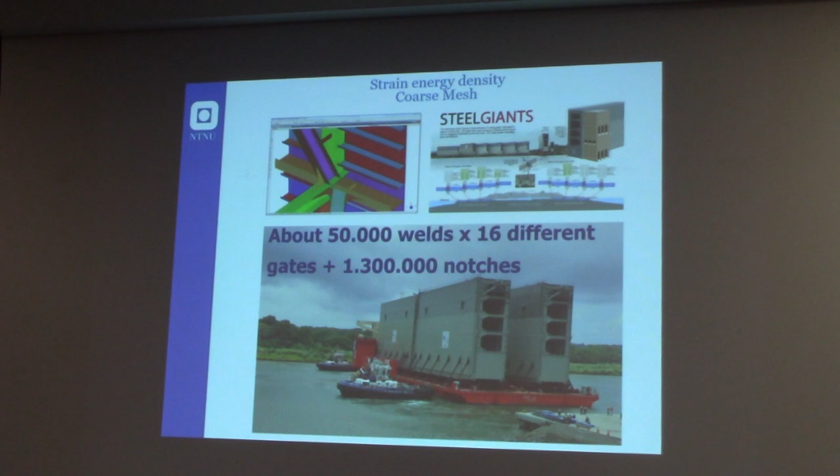This is another application for ships. We worked together with Hamburg University, which has a strong history in ship design, and we applied the energy approach to these kinds of details that are quite strange, with very good success. The master curve shown before is the red lines, and all the data for the three-dimensional model fall exactly inside the scatter band, so the master curve holds for these complex details too.

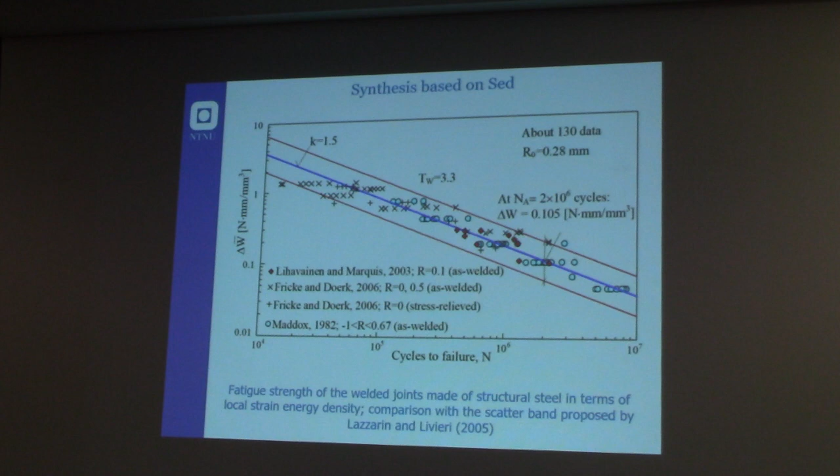If you want to understand or read more about this, there's a recent work by Professor Dieter Radaj and Michael Vormwald called Advanced Methods of Fatigue Assessment, which reports all the basics of notch mechanics and also covers a lot of the considerations I made today regarding this approach.

Radaj actually supports us, and he's mentioning us in the introduction of his book. But it's always useful when other people say what you're proposing is good, because if I say I'm proposing something good myself, I'm not trustable since it's my own approach. But if the German school starts to believe this method is useful, I think it's probably useful.

We also summarized this in a recent paper, the best paper I wrote with Professor Lazzarin, in a journal with an impact factor - I think you're familiar with impact factor now. This journal works by invitation only, for special authors, and when we published in it, the journal had an impact factor of almost 30, which was very high, and they dedicated a complete issue to our paper.

We made a 50-60 page journal paper, and the issue also featured our tests on the cover, so it was quite nice. They also paid me, I think, 600 euros per page or something like that, or maybe less - but I received a kind of honorarium for writing the paper, which was the first time in my life.

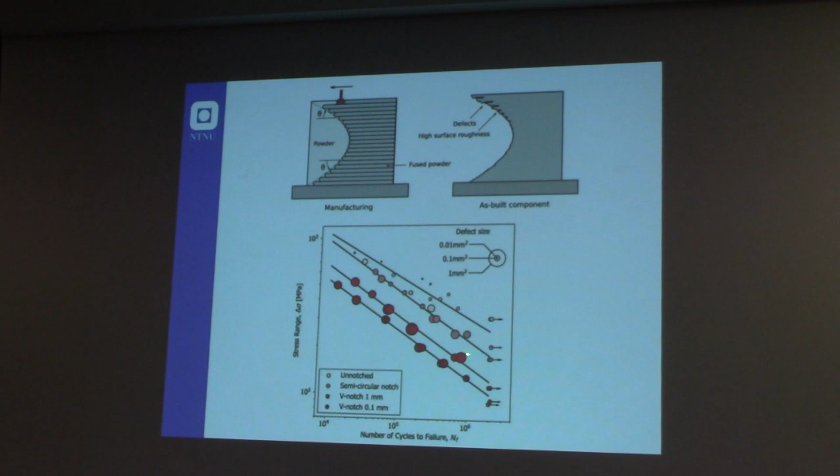So what we did is start to play a bit with the topic. We made different kinds of notch configurations: a semicircular notch specimen, a V-notch with a notch radius of 1 millimeter, a V-notch with 0.1 millimeter, and we also plot the fatigue curves showing the size of the defects that we find in the component. So we are not only plotting the stress level, but also for each shape, for each Wöhler curve, we are reporting the size of the defect found in the component.

I think it's a nice representation. And we try to propose a kind of diagram to understand, for no-notch, blunt notch, sharp notch, and crack, what is happening in terms of failure and mechanism.

After that, we also try to apply the strain energy density. We consider only mode 1 at the moment because the topic is quite new, but actually the results are very promising, and it's very evident that the strain energy density, if used properly, can be a very good tool also for predicting failure under fatigue loading, at least under linear elastic conditions for these materials.

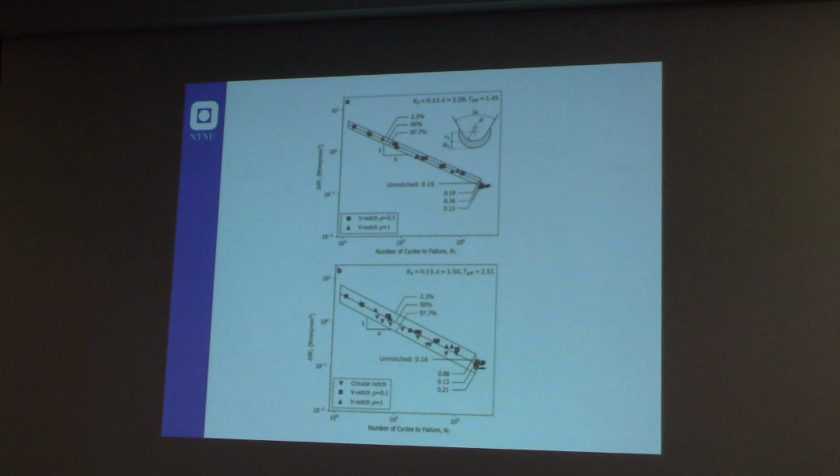Of course, this is an engineering approach. If you want to study the mechanism of failure and understand the physics behind it, it's a very complex tool. If you want to give an engineer the stress level they can have at a certain number of cycles, you have to accept an intrinsic scatter, and I think that's what we can do as engineers. I'm an engineer, not a physicist or a mathematician. I want to have, at the end, some tool for design purposes.

And we also changed different materials, so we are working on titanium. Of course, the process affects a lot the surface roughness, and what's also important to consider is the residual stress effect close to the surface for these components and materials. But with post-treatment, mechanical or HIP (hot isostatic pressing), you can actually reduce the level of porosity, and you can also do post-treatment for releasing the residual stress, so you can apply very easily the concepts we developed before.

I want to close this lecture. I was actually quite lucky and proud of my career, because I was so lucky to meet a lot of interesting persons in my life.